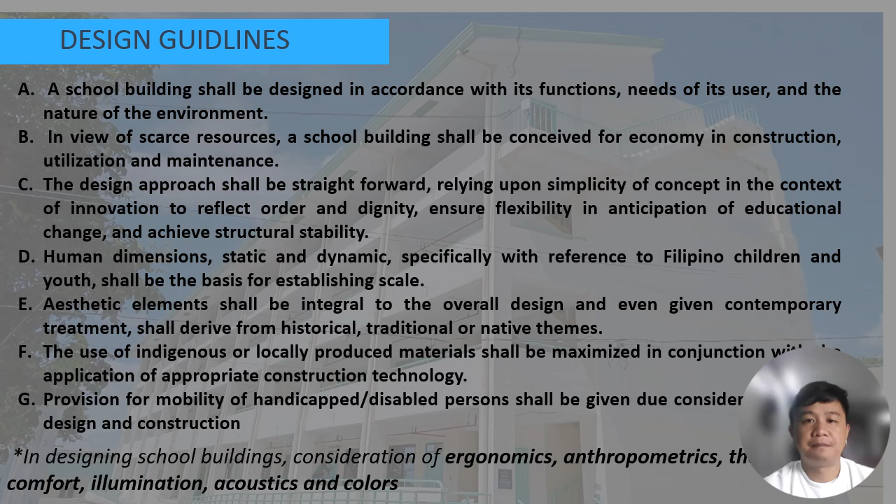In terms of placement and layout, a school building shall be properly oriented, for example, properly placed with regard to air current, natural light and heat from the sun, utility of the plant and ground, and most advantageous display. It is directly related to the health and comfort of pupils, students, and teachers, hence the efficiency of the school plant.

In terms of school building orientation, buildings located at coastal areas should consider the direction of possible storm surge. The impact of storm surge will be less if the shorter side of the building faces the coast instead of its front. The proper orientation of a school building aims primarily to minimize direct sunlight inside the classroom and to maximize the entrance of breeze or air currents. The solar path and the prevailing wind are the two major factors to be considered in orientation of the building.

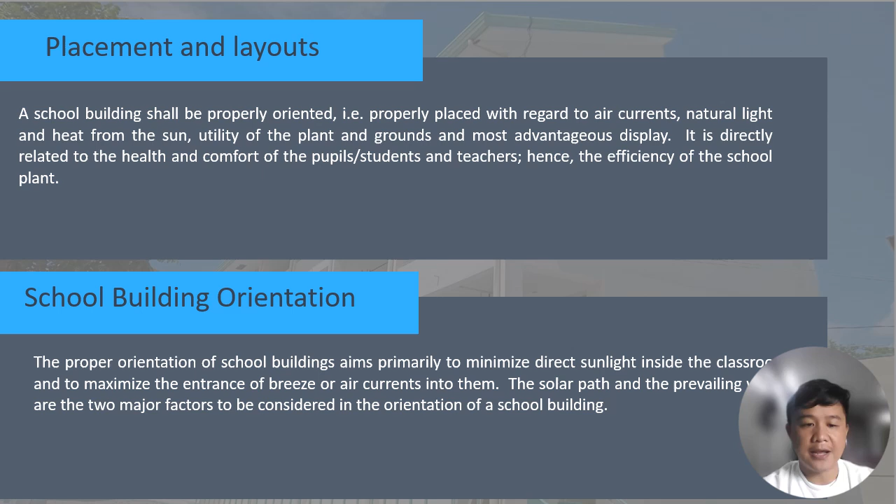School building orientation should follow the solar path. The sun path refers to the trajectory of sunlight as the Earth rotates on its axis, typically moving from east to west. The path is not static; it varies slightly with the season, which can influence how sunlight interacts with the building. For example, during the summer solstice, the sun is higher in the sky, while during the winter solstice, it appears lower. This seasonal variation is crucial for designing buildings that maximize natural light and minimize energy consumption.

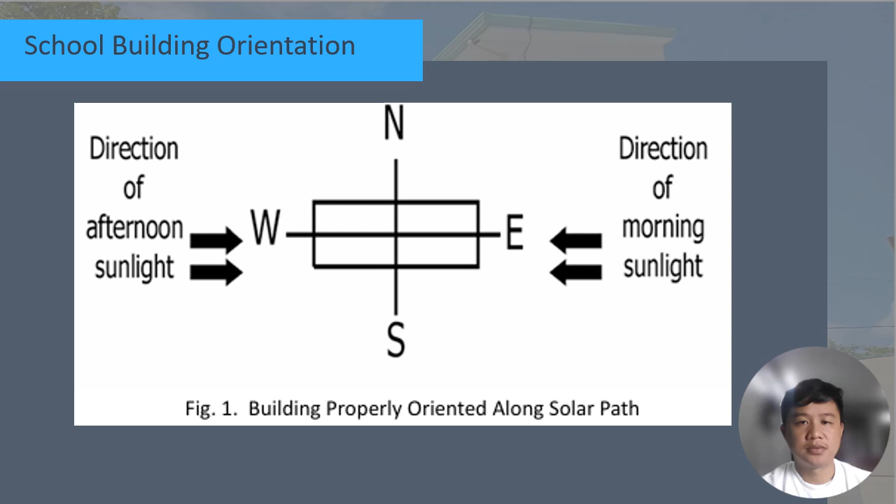Now, regarding the direction of the prevailing wind: the concept of prevailing winds, particularly in the context of school buildings, is essential for creating a comfortable and energy-efficient learning environment in the Philippines. Prevailing breezes typically blow from the northeast to southwest, specifically during the hot season. Understanding this wind pattern can significantly influence the design and functionality of the school building.

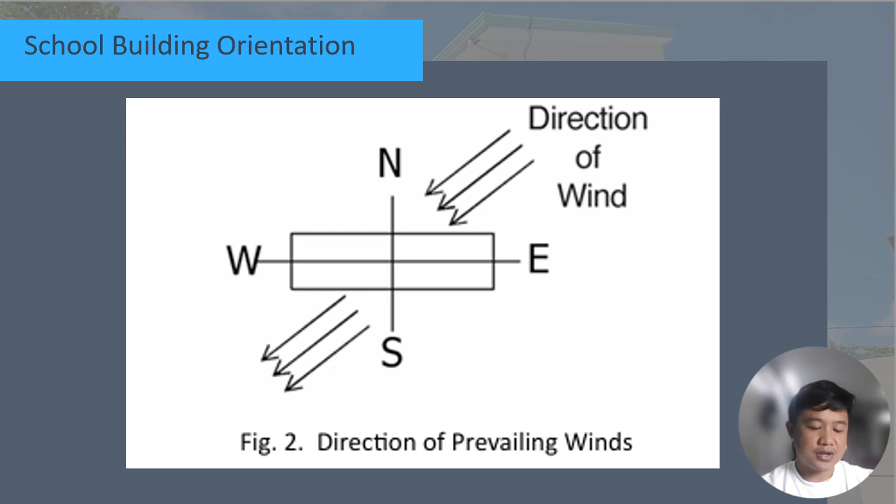Now we have the recommended school building orientation, which is slanting. The recommended orientation of school buildings in the Philippines is crucial for optimizing natural ventilation and minimizing heat gain, particularly given the country's tropical climate. By aligning school structures along the northwest-west to southeast-east axis, buildings can effectively capture the prevailing breeze that flows from the northeast to southwest, especially during the hot season. This orientation helps enhance airflow, making classrooms cooler and more comfortable for students and teachers, thereby improving the overall learning environment. The Department of Education, 2023, notes that proper orientation can reduce reliance on artificial cooling systems, promoting energy efficiency and sustainability in school design.

Based on my experience here in our school, we follow the orientation along the solar path.

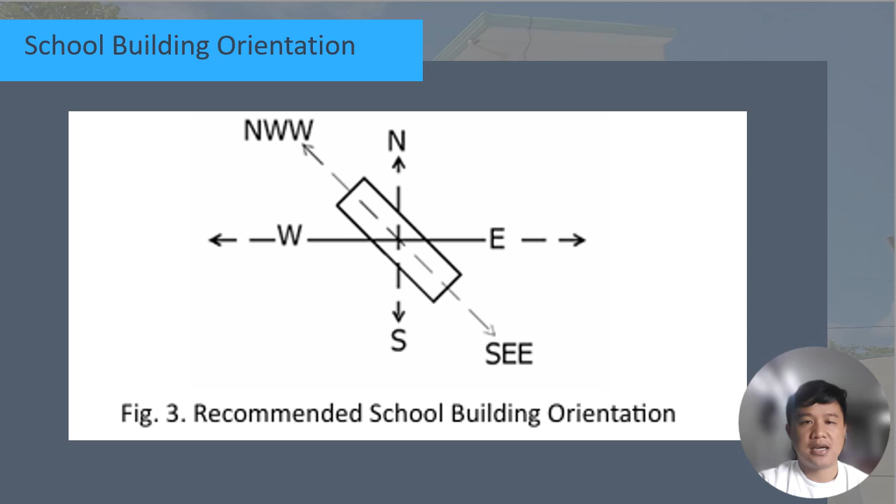Now, in terms of layout, the layout of school building and school site refers to the location and arrangement of school buildings to achieve maximum function, efficiency, and aesthetic effect. As a general rule, the different school buildings shall be laid out according to the functional group. The distance between school buildings shall be such that ventilation is not obstructed.

Natural illumination is not impeded and sound in one building does not carry into the next building. The suggested minimum distance between buildings is 8 meters between one-story buildings positioned side by side, and 10 meters between two-story academic buildings positioned side by side, and 10 meters between non-academic buildings.

For a main building facing the front gate, at least 10 meters distance is suggested. Greater distance than the minimum between school buildings is desired. Wider distance between buildings allows for adequate free space to be utilized for many school-related activities.

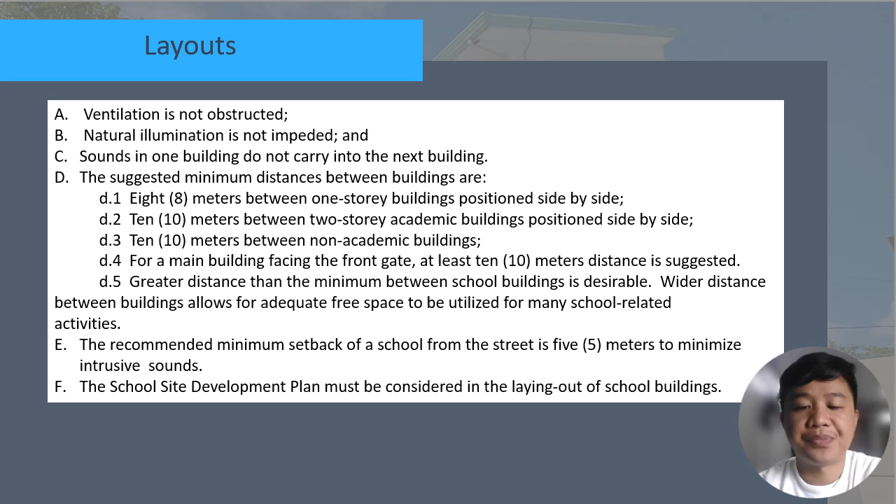We also have the recommended minimum setback of school from the street, which is about 5 meters, to minimize intrusive sounds. So it should be far enough from the highway so it's not too noisy from the vehicles. The school site development plan must also be considered in laying out the school building.

In terms of building plan, there are two types of plans for the design and specification of public elementary and secondary school buildings. First, we have the standard building plan. This is usually prepared by the architects and engineers in the Department of Education and the DPWH, and approved for general use in schools throughout the country.

We also have the special building plan. This is a plan designed specifically for a particular school for a special purpose, or because of certain unique or peculiar features at the school site.

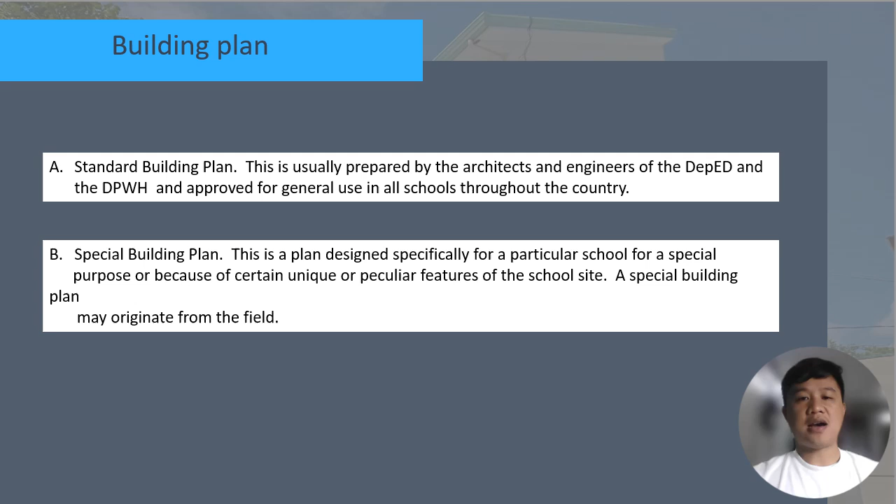A special building plan may originate from the field. It's like special buildings may be for those areas near the sea. So their specifications are different because they have to consider the high tide, low tide, or the potential for tsunami as well.

We have the building plan requirements. A school building plan originating from the field, local government units, and private entities shall be submitted to the Physical Facilities and School Engineering Division, Office of the Planning Services, DepEd, for review and approval.

These are the requirements. The plan shall be drawn on tracing paper measuring 0.50 by 0.75 meters according to an appropriate scale and shall show the following: perspective and site plan, floor plan, front, rear, right, and left elevation, two sections, foundation plan, floor framing if elevated, roof framing plan, ceiling plan, and electrical layout, plumbing layout, and the details.

Second requirement is the original copy of the plan on tracing paper together with two sets of white print or blueprint shall be submitted. Third, the architectural and structural plans shall be signed by the architect and civil engineer respectively, duly stamped with their dry seal along with the registry number, professional tax receipt, and tax identification number. Fourth, the structural computation signed by a registered civil engineer and stamped with the dry seal shall be submitted together with the plan for checking. The registry number, professional tax number, and tax identification number of the civil engineer shall also be indicated.

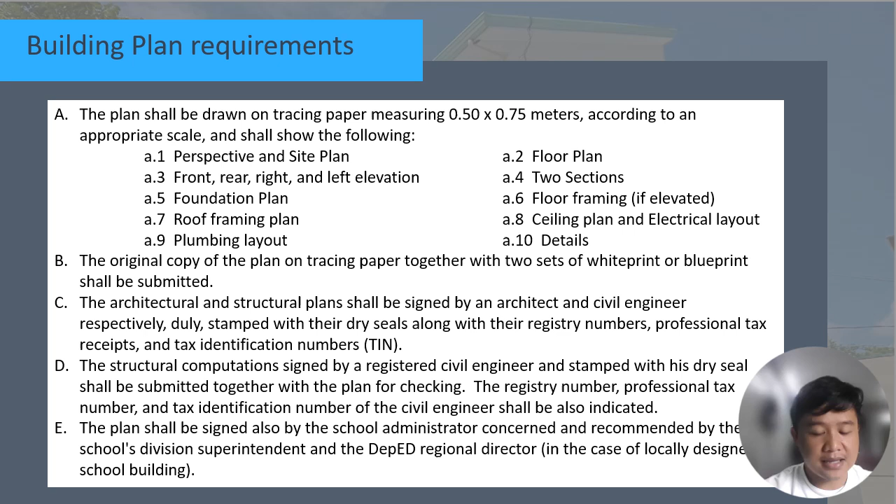The design requirements for school buildings: windows shall be equal to or at least 10% of the floor area of the room. Windows for toilets and baths shall be not less than 1/20th of the floor area of such room, or not less than 240 square millimeters.

The ceiling height of the room with natural ventilation shall be not less than 2.70 meters measured from the floor to the ceiling, and a room provided with artificial ventilation shall have a ceiling height not less than 2.40 meters.

For floor construction, all floors shall be framed and secured into the framework and supporting walls so as to form an integral part of the school building. The type of floor construction used shall provide means to keep the beams and girders from buckling.

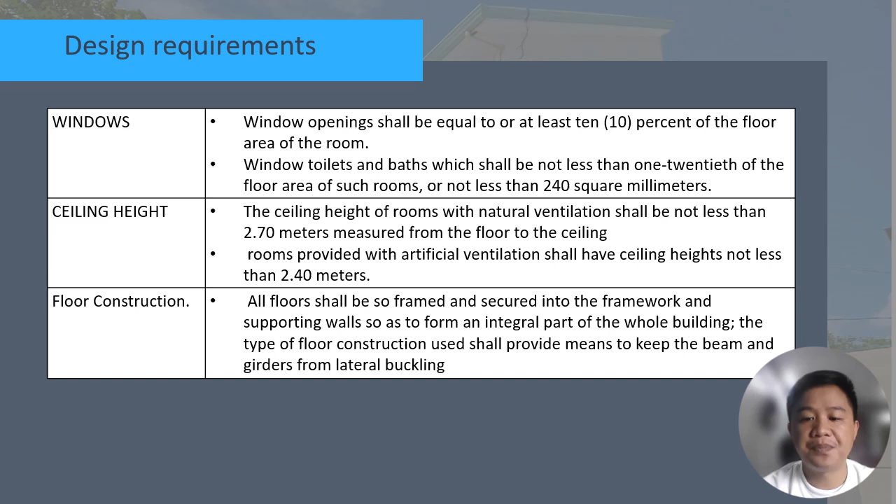For roof construction, all roofs shall be framed and tied into the framework and supporting walls so as to form an integral part of the whole building. Gutters, roof drains, flashing, etc. shall be provided. Purlins can be made up of angle bars instead of conventional C-purlins, where tek screws easily loosen, resulting in the detachment of roofs, and the thickness of angle bars serves as a knot holding tek screws firmly. Purlins are securely welded to steel trusses, creating a sturdy roof framework.

And for exit doors, the classroom should have at least two exit doors where the number of room occupants is over 50.

In case of classroom, conference room, exhibit room, gymnasium, school shop, vocational institution, laboratories, auditorium, there shall not be less than 2.10 meters high and 900 millimeters wide.

The door shutters shall be swing out and be capable of opening at least 90 degrees so that the clear width of the exit way is not less than 700 millimeters. No door shutter shall exceed 1.20 meters in width.

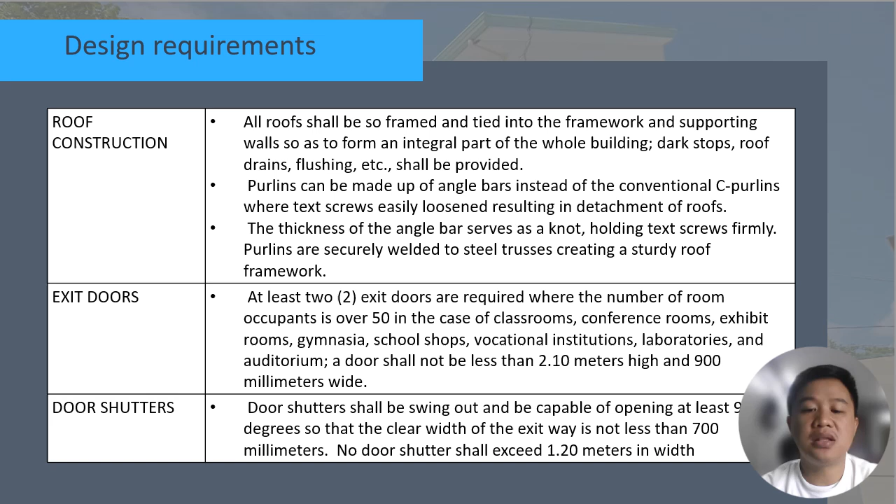Every corridor shall not be less than 1.10 meters wide and shall be unobstructed. Stairways serving an occupant load of 50 or less must be 1.10 meters wide. Those serving more than 50 shall not be less than 1.50 meters.

The rise of every step shall not exceed 200 millimeters, and the tread shall not be less than 250 millimeters. Handrails shall be provided on each side of every stairway having more than 4 steps.

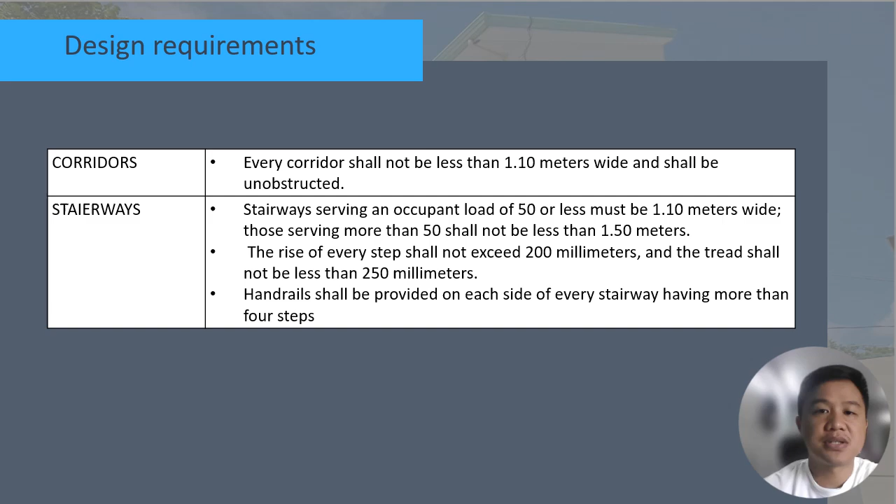Next is the building risk reduction requirements. Risk reduction refers to the strategic and measured implementation to minimize the likelihood and severity of potential losses or damages from various hazards.

This concept is essential across multiple sectors including business, healthcare, and education as it helps protect individuals, assets, and communities from adverse effects. In the context of education, risk reduction involves identifying potential risks such as natural disasters, accidents, or health emergencies.

For example, schools may conduct safety drills, improve infrastructure to withstand earthquakes, or develop health protocols to manage outbreaks. Effective risk reduction not only safeguards the well-being of students and staff but also ensures the continuity of education activities, thereby enhancing the overall resilience of educational institutions.

In this topic, we'll discuss the risk reduction requirements for parts of school buildings and amenities, the hazard resilient approaches, emerging issues and concerns, understanding structural issues, immediate remedial measures, building failure mitigation, and miscellaneous requirements.

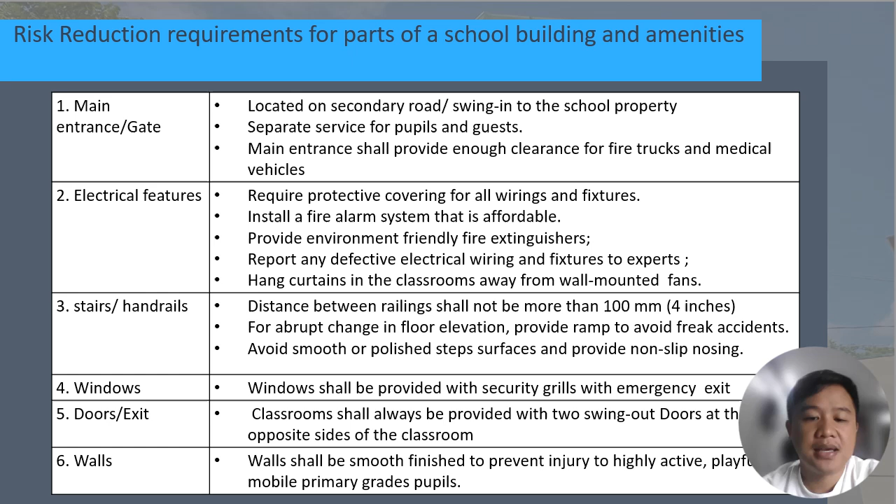We have the hazard resilient approach. The Philippines is prone to various natural disasters like typhoons, floods, and earthquakes, which can damage school buildings and consume a significant portion of the Department of Education's budget. Instead of using funds for repair, money could be allocated to build new schools.

To address this issue, initiatives are being developed to reduce the impact of these hazards through hazard mitigation planning and disaster risk reduction programs. Mitigation involves taking steps to lessen the vulnerability of the school to natural and man-made hazards, aiming to minimize the loss of life and property. This process starts with a risk assessment which identifies potential hazards and their impact on the school. Understanding this risk helps in prioritizing the implementation of appropriate mitigation measures.

Key principles include cost effectiveness, the multi-hazard approach, and designing disaster-resilient buildings. In cost effectiveness, implementing mitigation measures before a disaster is more economical than retrofitting after damage occurs.

The multi-hazard approach is a risk reduction technique where measures should address multiple hazards simultaneously to maximize effectiveness and efficiency, such as earthquake-prone or flood-prone types of buildings, so it addresses not just one disaster but multiple disasters. Then designing disaster-resilient buildings.

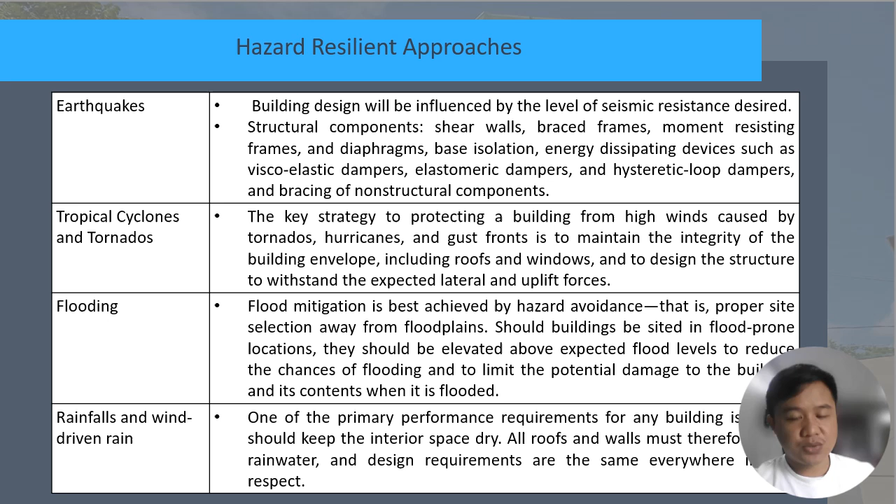Now we have differential settlement or subsidence. Ground subsidence can result from mining, sinkholes, underground fluid withdrawal, hydrocompaction, and organic soil drainage or oxidation. This happens when the ground underneath becomes hollow due to mining, creating sinkholes, causing the school building to sink.

Subsidence mitigation can best be achieved through careful site selection, including geotechnical study of the site. That is why it is very important to study the soil before constructing or putting up a school. In subsidence-prone areas, foundations must be appropriately constructed, basements and other below-ground projections must be minimized, and utility lines and connections must be stress resistant.

When retrofitting structures to be more subsidence resistant, shear walls, geo-fabrics and earth reinforcement techniques such as dynamic compaction can be used to increase resistance to subsidence damage and to stabilize collapsible soil.

Landslide is technically a gravity-driven movement. Techniques for reducing landslide and mudslide risk to structures include selecting non-hillside or stable slope sites, constructing channels, drainage systems, retention structures, and deflection walls, planting ground cover, and soil reinforcement using geosynthetic materials, and avoiding cut and fill building sites.

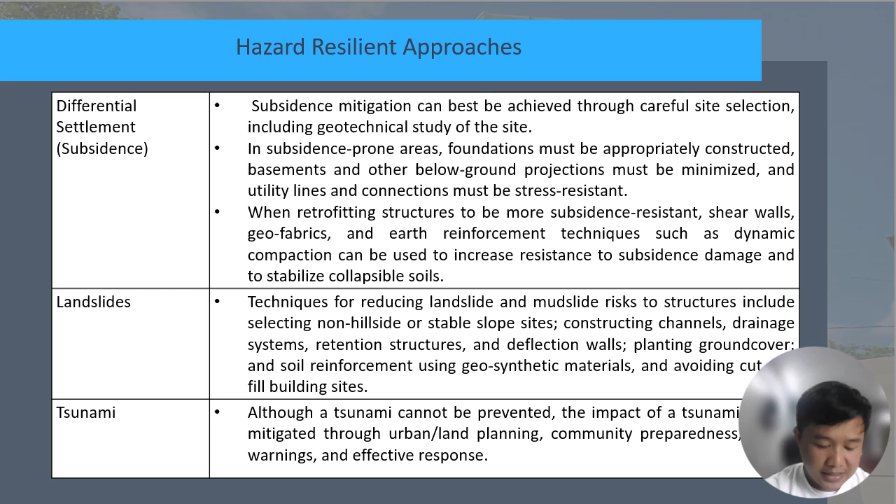Then we also have tsunami. A tsunami is a series of waves generated from a sudden displacement of the sea floor, landslide, and volcanic activities. Although tsunamis cannot be prevented, the impact of a tsunami can be mitigated through urban land planning, community preparedness, timely warning, and effective response.

Emerging issues and concerns in school buildings: when implementing measures to make school buildings safe, secure, and conducive to learning, there are some important issues to consider. We have hazard mitigation and sustainability.

Measures that protect buildings from hazards can also contribute to long-term sustainability. So during the planning stage, it must already be considered, implemented, and accounted for, like natural disasters. Of course, there is long-term sustainability of the building involved; it's not easily achieved.

Then there's the cost of mitigation in retrofits. Incorporating hazard mitigation into existing buildings can be expensive, especially for buildings constructed before modern building codes were developed. So it should be incorporated from the start, because the cost for mitigation is more expensive if we have to incorporate these measures into an existing building.

Then we have relevant codes and standards. Building codes and regulations define the minimum requirements for hazard mitigation, but designers should go beyond these minimums to ensure buildings can adequately withstand the forces they're designed for. Special mitigation requirements will be needed for special hazards in certain locations.

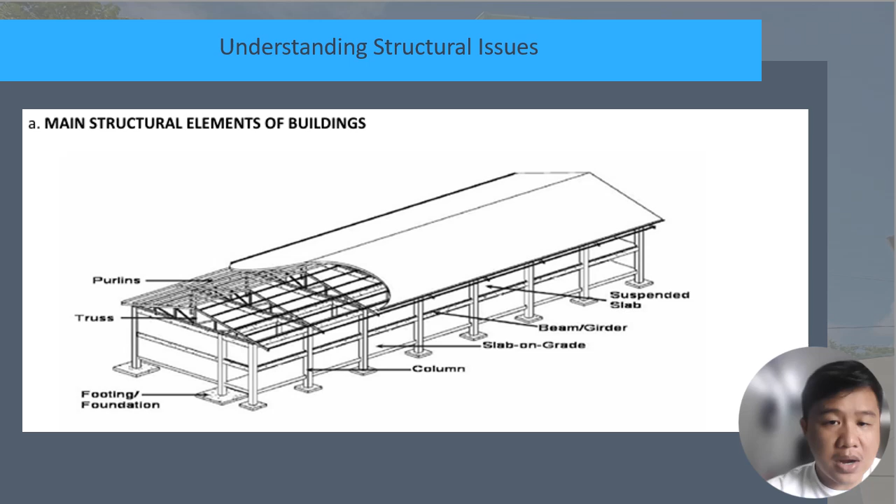We have common structural problem failures and causes related to concrete preparation and maintenance. We have crazing, which is a pattern of fine cracks that do not penetrate much below the surface and are usually a cosmetic problem.

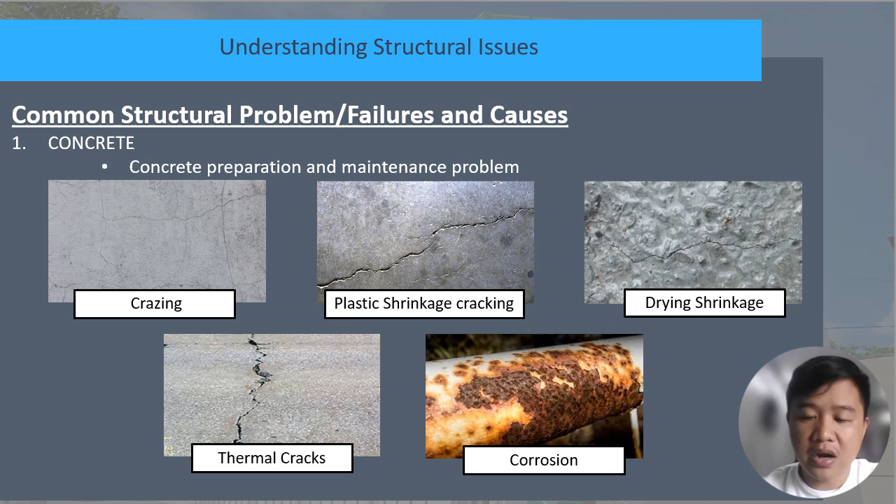And then, of course, corrosion. Corrosion of reinforcing steel and other embedded metal is one of the leading causes of deterioration of concrete, referred to as rusting.

So again, we still have the common structural problem failures and causes, specifically concrete performance problems of structural concrete foundations. We have foundation settlement.

Foundation settlement cracking may be caused by differential settlement of the footings, poor original construction, water, nearby blasting operations, or improper soil preparation, resulting in the foundation cracking.

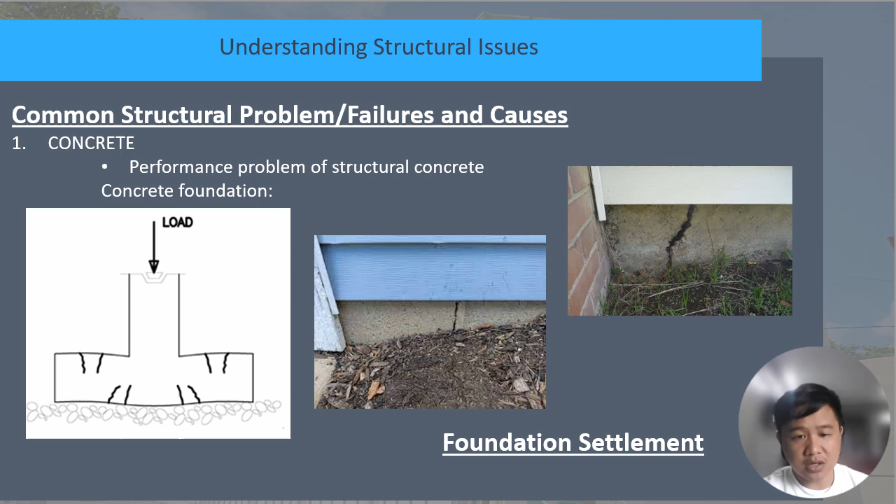Now we also have other common structural problems for concrete. We have punching failure.

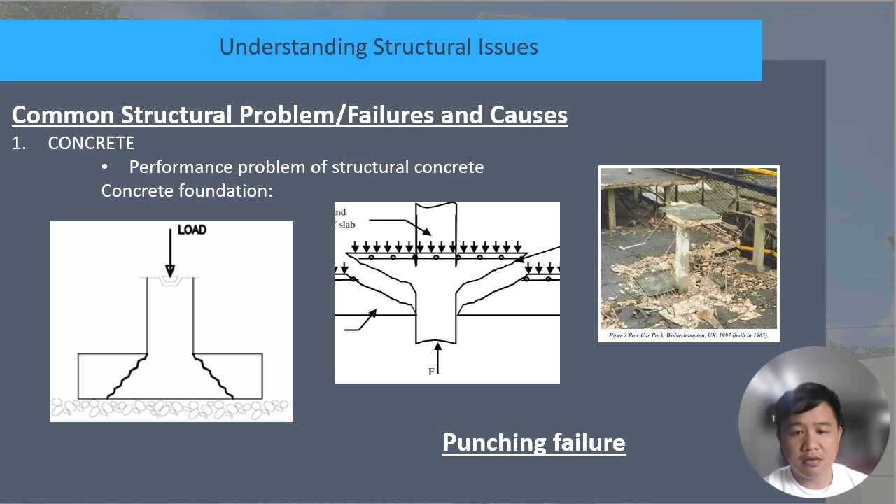Punching failures are caused by excessive concentrated loads or point loads, improper use of material, or inadequate foundation thickness. This is a punching failure, where the foundation gets detached, as you can see in the picture.

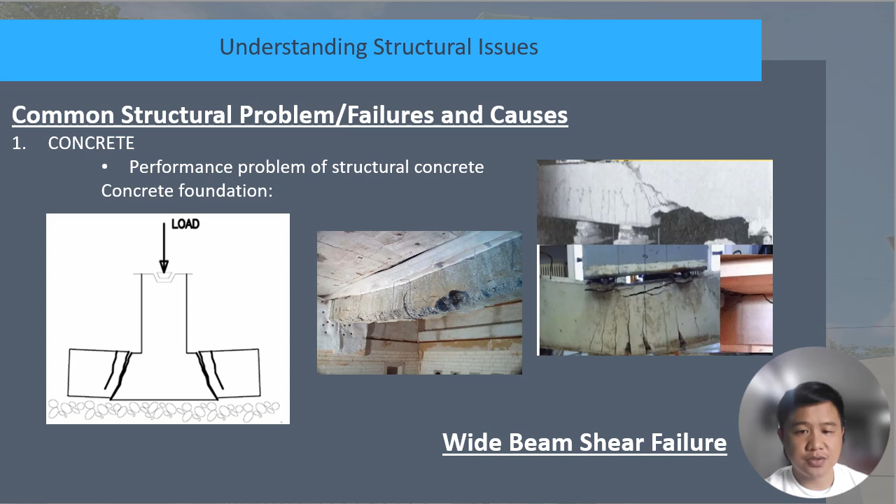We also have another common problem structure for concrete: wide beam shear failure, maybe due to improper use of material and or inadequate foundation thickness, meaning the foundation lacks sufficient thickness, so it cracks, as you can see in the picture.

Then we also have bending failure. This is due to improper use of material, inadequate foundation thickness, or inadequate reinforcing bars. So it lacks thickness and also lacks bars, which is why it bends and the concrete foundation cracks.

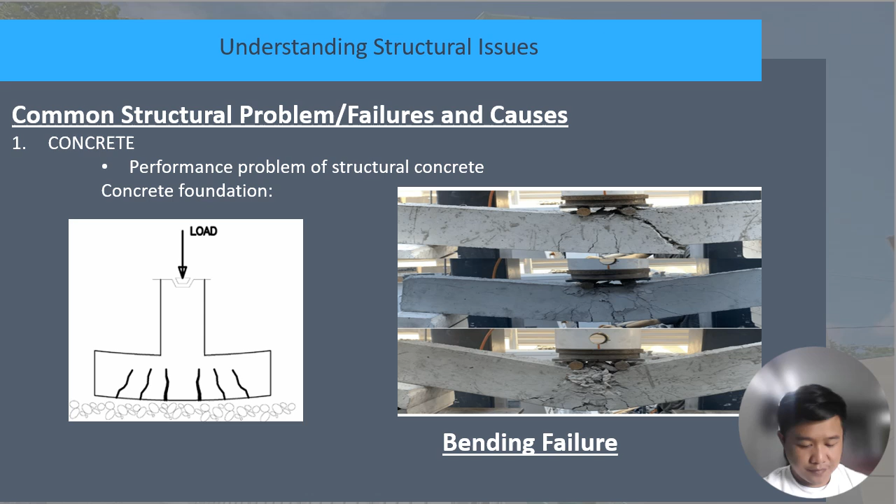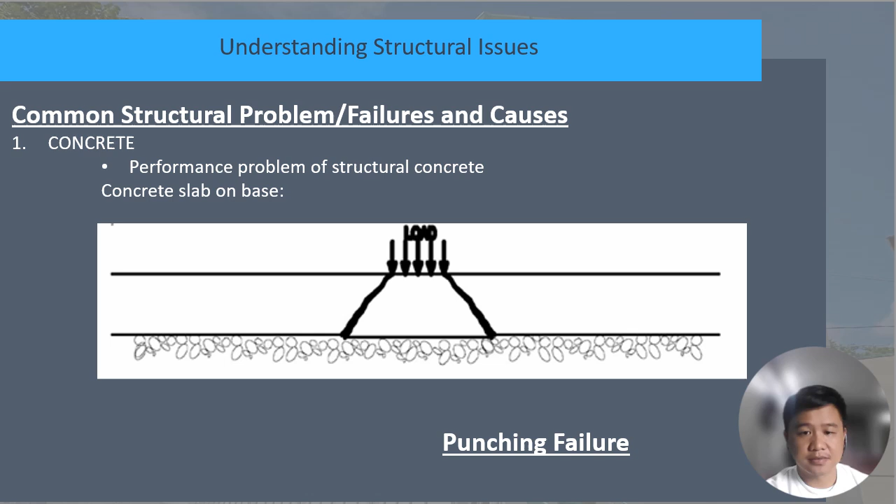This is also one of the common structural problems in concrete on the slab on grade. We have punching failure due to excessive concentration of loads or point loads, improper use of materials, and inadequate slab thickness. We also have settlement failure.

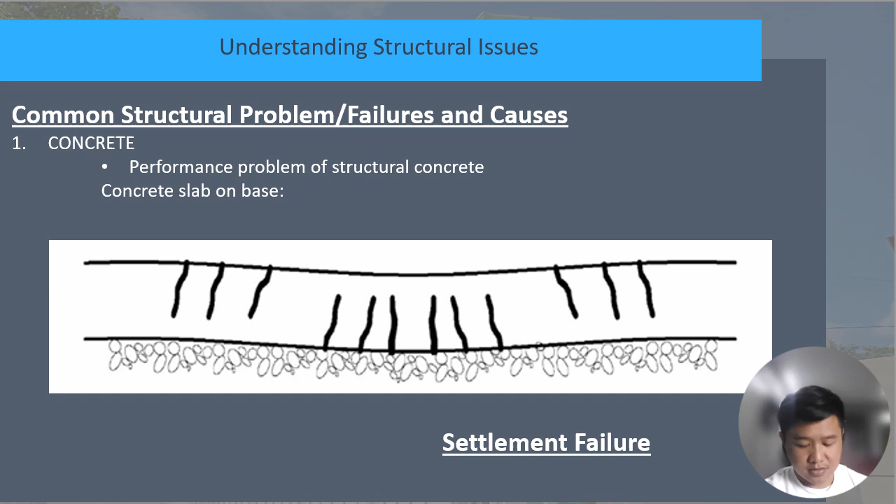A slab may indicate inadequate site preparation, such as failure to compact fill, in which the slab was poured, meaning the ground underneath is uneven, so it cracks.

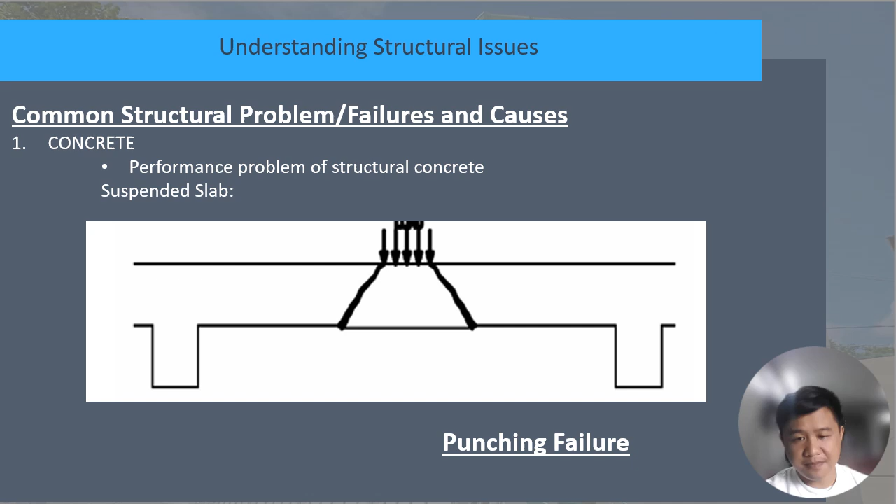On suspended slab, there is also a tendency of punching failure.

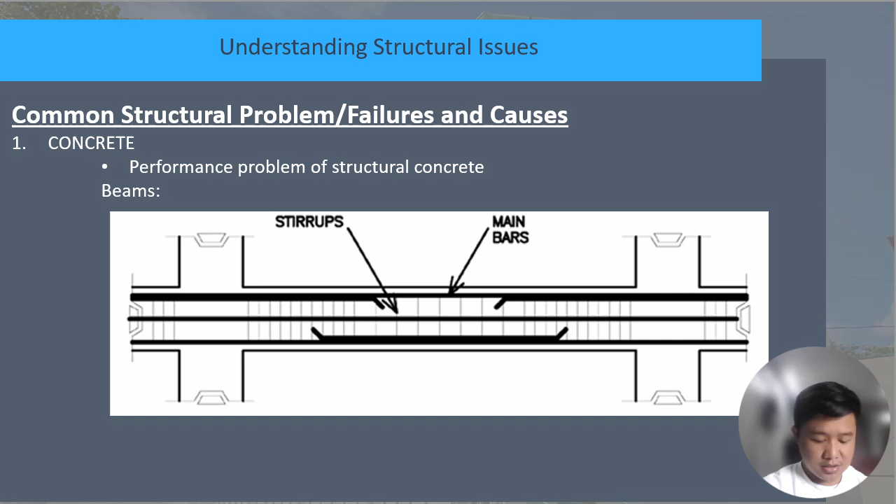The common structural problems and failure causes continue here with concrete beams. Beams refer to a vital load-bearing element that resists vertical load, shear force, and bending moment. That is the beam at the top which connects to the foundation walls. So we have bending failure.

This is when the beam curves due to inadequate size or inadequate main reinforcing bars.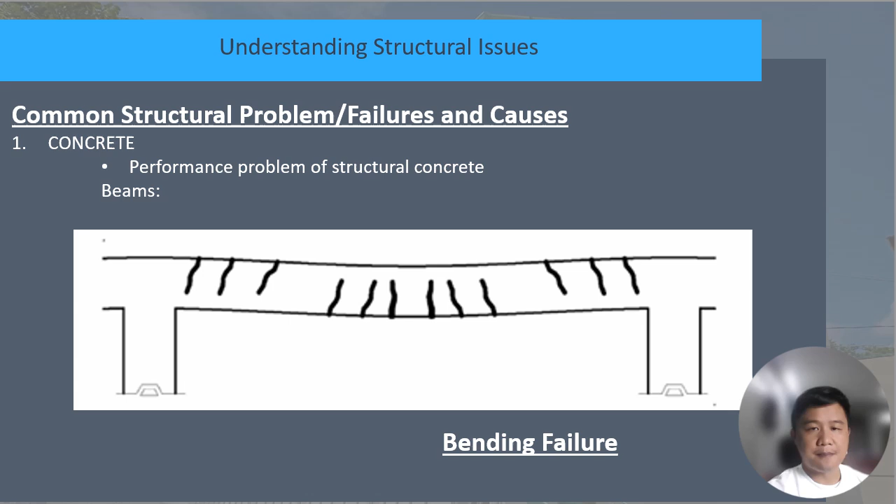We also have common structural problem failures and causes on the columns, connecting to the beams. The tendency is bending failure, shear failure when overloaded, so it seems like the sides crack. These are due to improper use of materials.

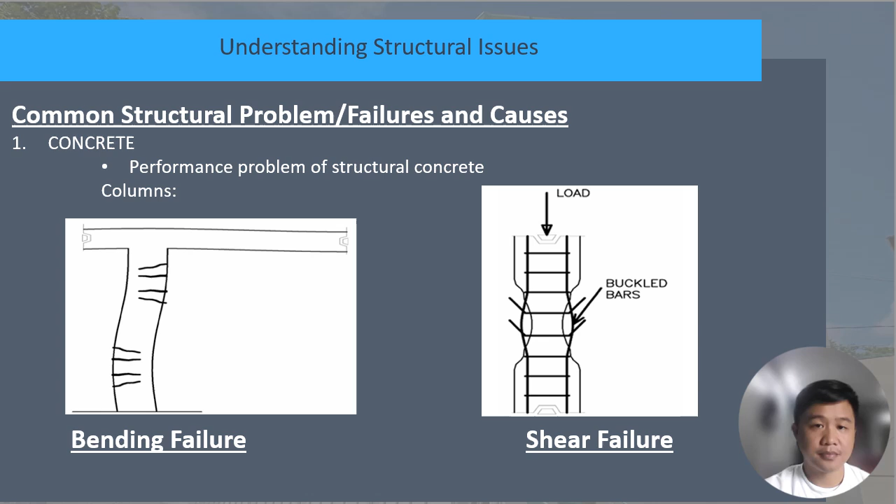And we have the common structural problem and failures and causes for structural steel. Failure due to environmental exposure. So we have bending failure, shear failure where both sides crack, and then we have the buckling failure. These are due to failure from heat. Heat changes the steel characteristics which lead to deterioration in strength. And then corrosion, so it rusts. Steel corrodes in contact with water.

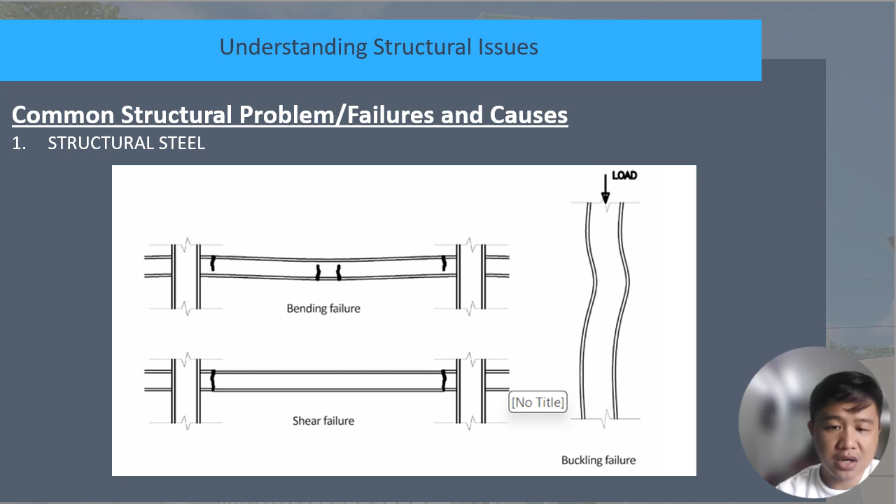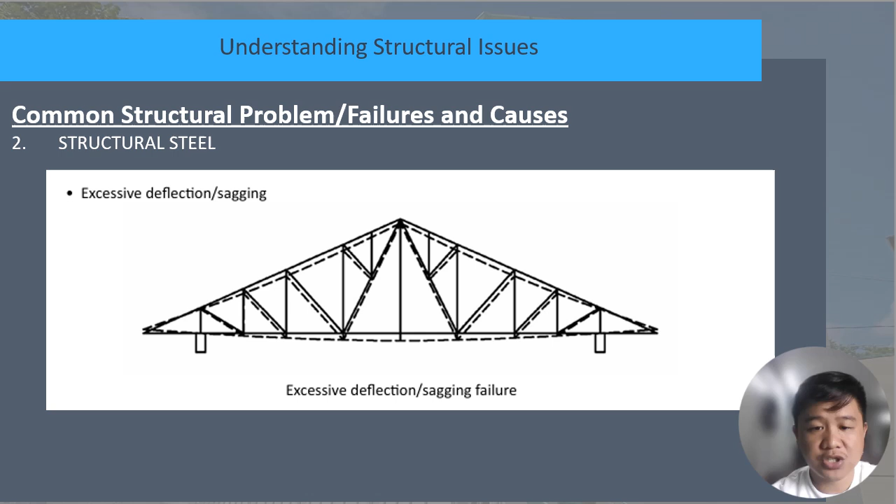So for performance and problem structure, we have bending, shear, and buckling failures. And we also have this excessive deflection, sagging, so many of the steel are no longer straight.

So the immediate remedial measures, if you find those failures in your building construction, is of course first, do not occupy the building as it is not safe. And then the project engineer should initiate a material testing, a compressive strength of concrete, a yield strength of steel. So you may contact engineers to do that. And then immediately the structural engineer should be called on to investigate further.

The background information of the building, the location description, what it is composed of, year constructed, project implementer, and then the plan dimension of the building showing the members, member size, and dimension and location of failures of the members - cracking, sagging, crash, buckling, settlement, etc. as mentioned earlier. And then pictures of failures, so we're able to provide also the pictures of the failure.

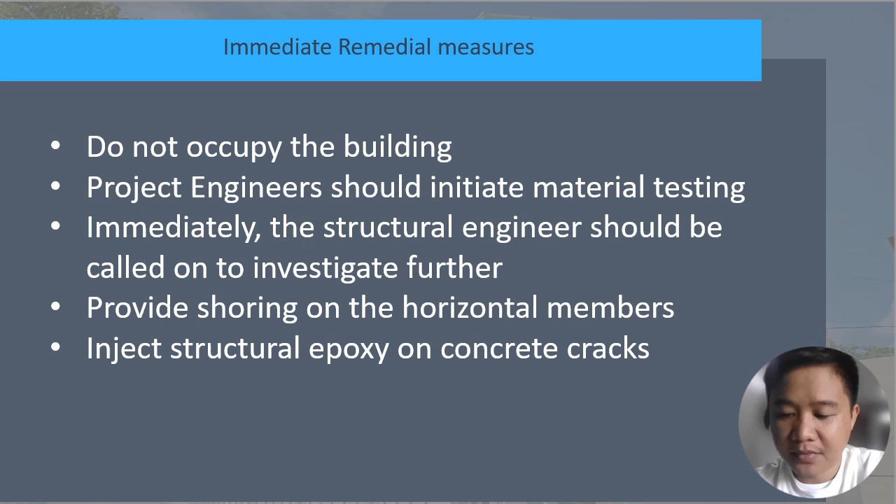The geotechnical report where the soil bearing capacity is shown, result of material test, provide, and then after that is provide shoring on horizontal members. And lastly is inject structural epoxy on concrete cracks. It is only applied by professionals, of course.

So building failure mitigation. Most structural failures are due to failure to comply to the requirements shown in the structural plan and specification. During planning, it's already been measured, so there is a standard on how to do the school building, but of course there is always a failure. So the reason for this is not complying to the requirements shown in the structural plan and specification - members, member size, the reinforcement, the material specification, the soil preparation, and construction methodology. Having good quality construction is the best way to prevent any structural failure.

So the following shall be the basis for implementing structural mitigation of structural failures. This must also be the basis of accepting and rejecting works. So the most updated and official plan and specification must be used. Make sure that these documents have structural engineer's signature and seal. So of course, make sure that all the involved engineers must sign and seal.

Then conform with the specification and requirement, structural standard and construction notes. Then ensure that the required member size and material strength will be used, and only the accepted standard methodology will be implemented. Should there be any failure in the material strength test or any structural problems encountered during construction, immediate remedial measure must be carried out. The various types of problems with regards to structure can create a danger or costly situation.

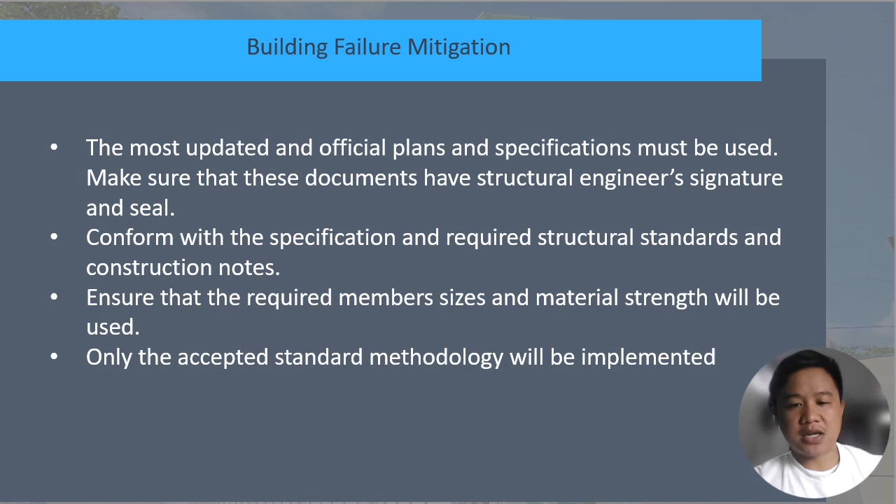The miscellaneous requirement in the construction of building under plans and specification prepared by the Department of Public Works and Highways and approved by the consulting architect - no change affecting either architectural features nor substitution of material shall be made without the approval of the consulting architect.

So once it's already been planned, the specification should not be changed without the approval of the consulting architect. And under no circumstances shall any plan, whether prepared by the Department of Public Works and Highways or not, be used for any project other than the one originally intended without first securing written approval of the consulting architect. So if a school building is prepared by the Department of Education, it should be specific to that project only, so it's not allowed to be used elsewhere or copy the same specification to another.

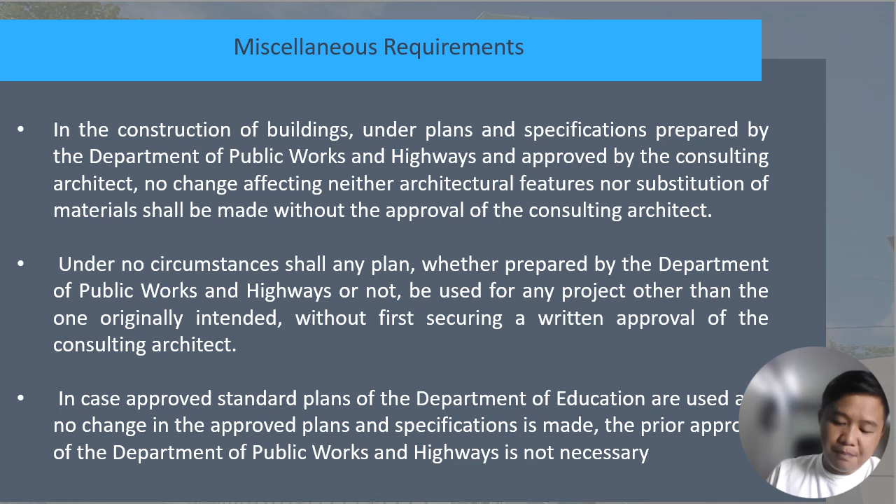Then in case approved standard plans of the Department of Education are used and no change in the approved plan or specification is made, the prior approval of the Department of Public Works and Highways is not necessary.